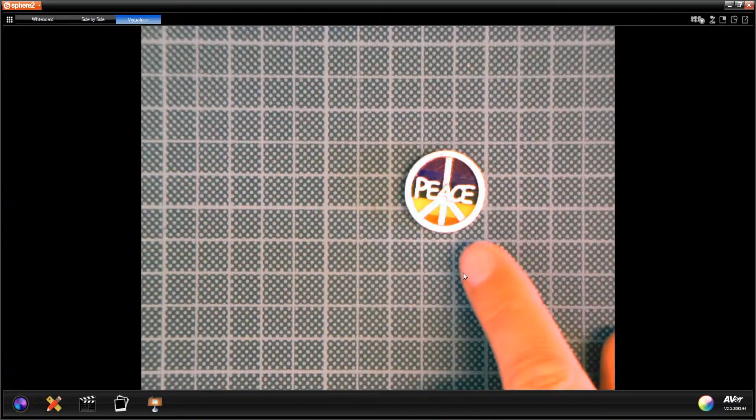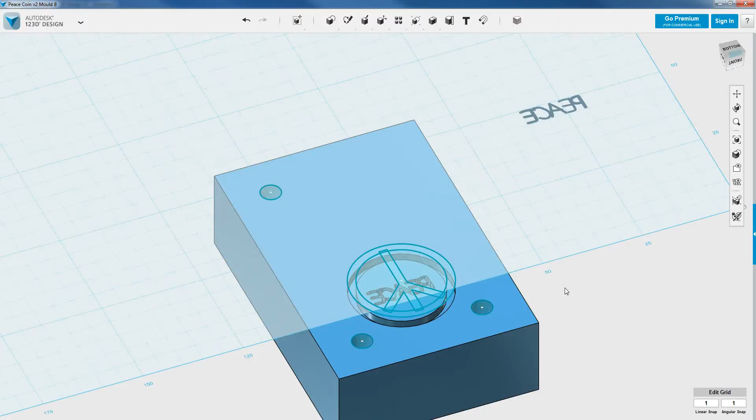This is Design Nations, and we're almost at a stage where we can go ahead and mill out the molds that are going to make this peace coin. This is the last thing I did, I made this other half of the mold, which is going to give me my peace symbol with these locator pins. What I want to look at now is how we can get this as STL files, standard tessellation language files, and place those into our post-processing software that lets us control the milling machine. If you don't get any of that, don't worry, we're now going to go through it blow by blow.

Let's export this as a 3D model, and I'm going to export it as an STL file. Fine quality, absolutely fine, same place as they were before. Let's just have a look at what I'm going to call that. I'm going to do something on my extended desktop here. I want to go to there. This was this file name here, so let's drop that in and save it as an STL file.

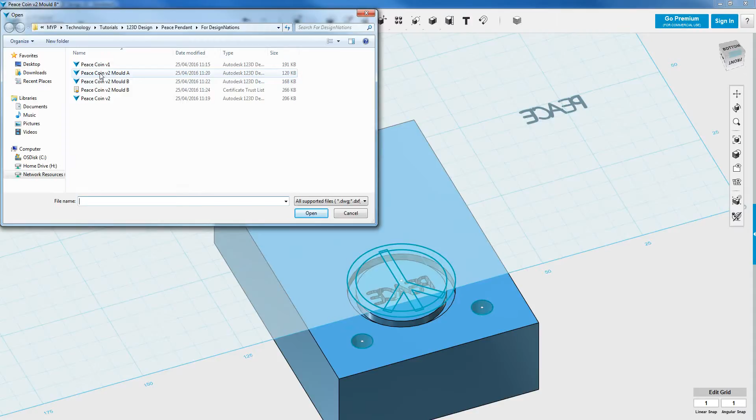Done. Now I'm going to open, I've already saved that so I'm fine. I'm going to browse, I want to open mold A, and I also want to export this as a 3D STL file. I'm going to call that mold A. Okay, absolutely awesome. Let's now have a look at a visual toolpath.

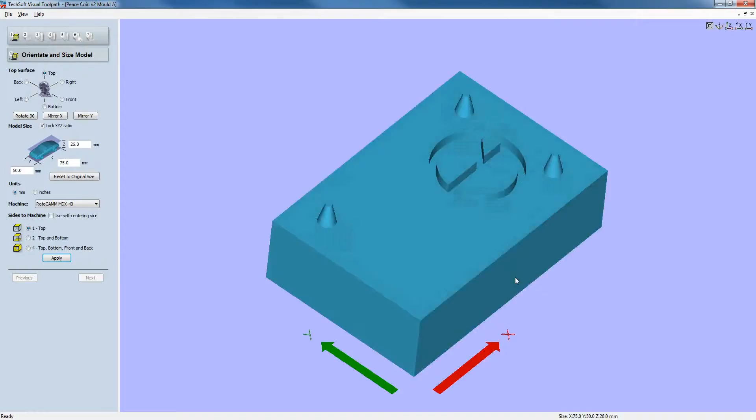What I'm going to do here is drag and drop these files in. So we have got an STL file for mold A, and there it is, this is what I made last time, okay. One or two things I need to do here. I'm going to rotate it so that X is the short edge because I'm going to mill it in this orientation, and I'm going to rotate it again. I like to have it the proper way around there. So that's the origin.

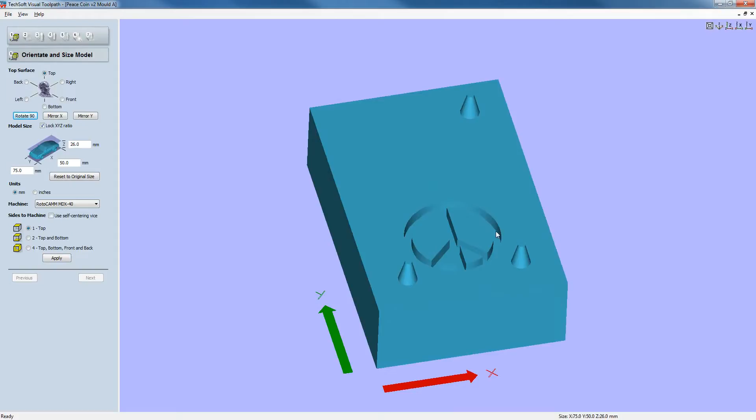Let's have a look here, yeah, that looks absolutely fine. I need to do a few configurations here for the milling machine we have in our workshop, so it's a Roland MDX40. I'm going to turn on the self-centering vice, I'm going to confirm that. Let's go next here, everything's good there, let's go next.

Do I want a roughing? I am going to have a roughing with this because I want to basically remove most of this waste material quickly. So let's go. Oh, I haven't got a roughing tool for this. Okay, well, you know what, let's make one right now.

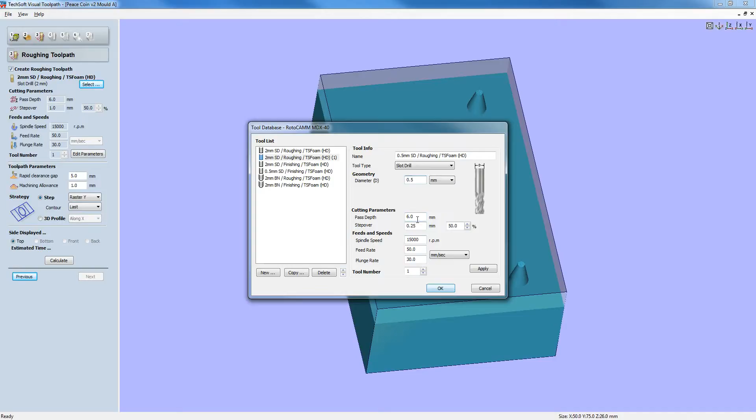Let's make a copy of that 2mm roughing. Let's specify this to be, I'll work with my 0.5mm slot drill. Diameter's 0.5, looking nice, I'm happy with that. Pass depth is going to be 4mm for the depth of the fluting. Apply, okay, and let's do a calculation. Machining allowance, okay, I'm not worried about that. And there we are, so it's going to do one pass, which is going to take off 4mm, and then leave the last millimeter left to work on.

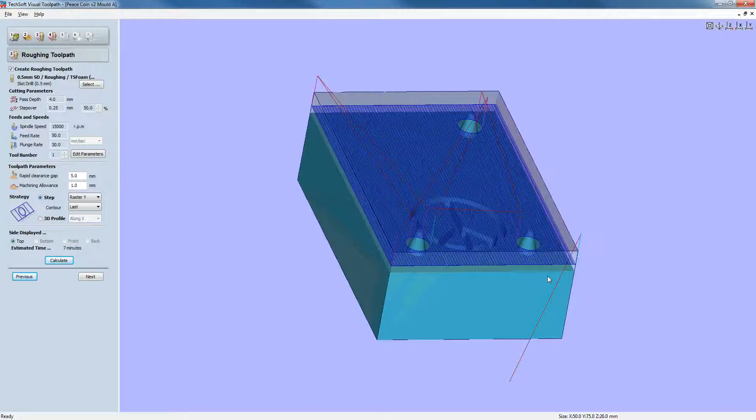So if I zoom out here, you can see this is the starting point of the tool. It comes in, drops down, and then goes backwards and forwards, over and over again, just making a few modifications as it doesn't want to cut out these pins.

Okay, let's come to the finishing toolpath. This is going to be with my 0.5mm finishing tool. I'm going to cut it along the Y because Y is the long length, it's going to be fractionally faster. Let that process.

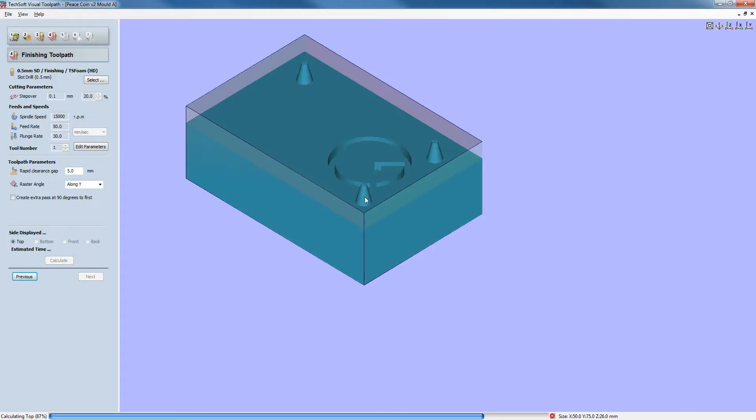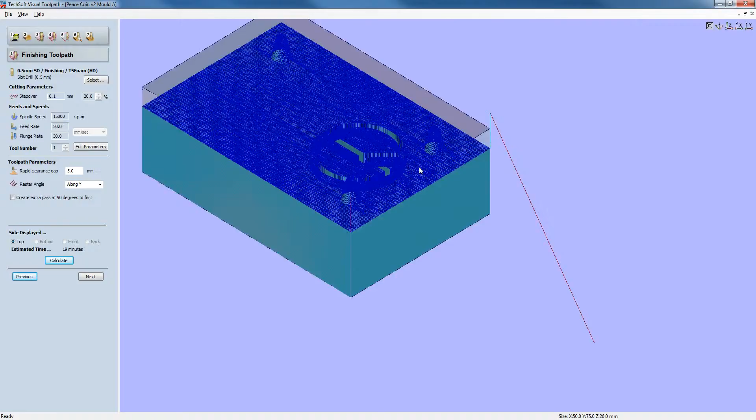And now what I can see, there we go. Again, it moves from the origin, comes in, and if I zoom in on this I can see, well let's just try and scale it a bit better. If I zoom in, each of these blue lines represents a pass of the tool, and it's going to be basically thousands of passes, in fact each pass is 0.1 of a millimeter, I believe. So as it moves into the actual cavity here, you see how the tool goes down and cuts out this peace symbol.

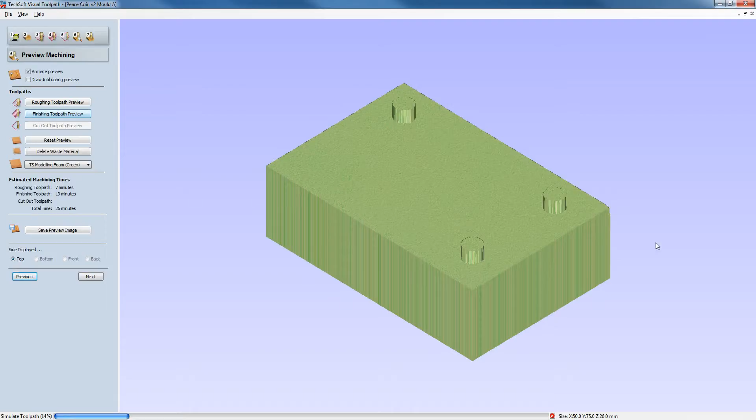So if I come to the actual previewing here, we're doing this onto the modeling foam, and what I'm going to get here is this. I have a roughing toolpath, which is going to cut out most of the material leaving space for the pins, and a finishing toolpath, which is then going to mill off that top face and leave me with the cavity here.

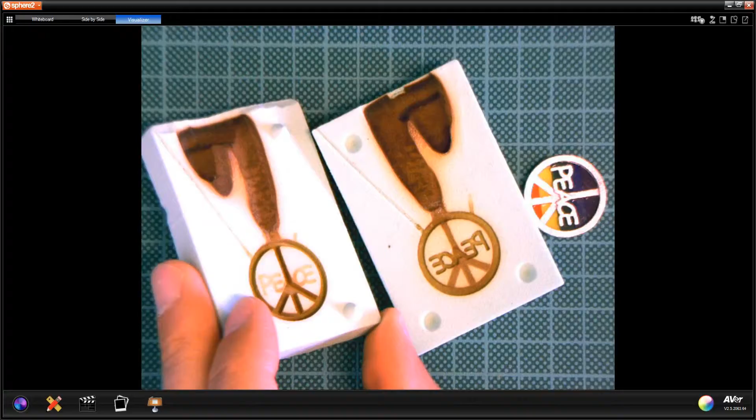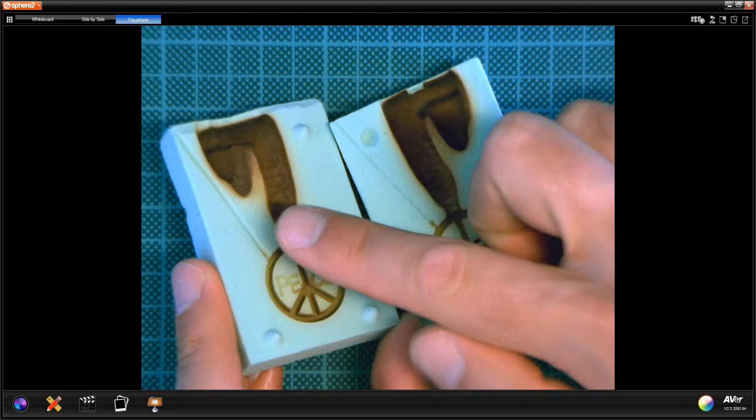And what I've just made in that video there, in that process, is this. I've got my locator pins, I've got the cavity. Notice the peace symbol is burnt in there when the pewter was poured in, and I've added in the well, the runner, and the risers here manually afterwards using a Dremel and a craft knife.

Okay, so that's one file ready to go. Let's just make sure that that is saved. And I'm just going to call it that, so that's fine. Okay, now let's start a new one. Can I just drag one in? Let's have a look here. Mould B, yep, here it is.

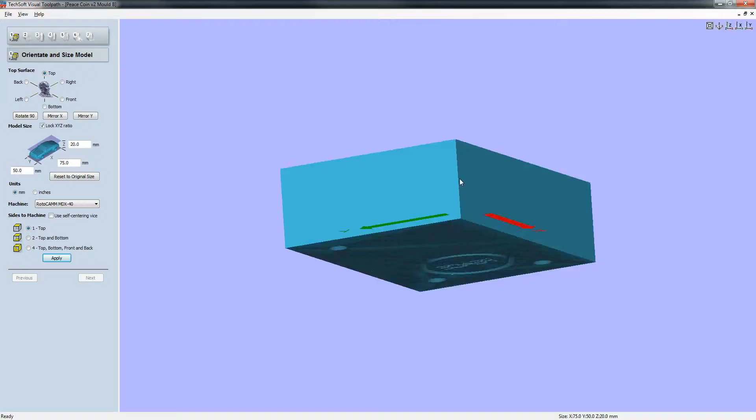Now notice that this one's upside down. Oops, okay, so I need to look at it from the bottom, and I want to rotate it. Again, I'm going to make it so that it's the right way around. So there we are, now the X is at the bottom here.

Now notice that the peace text here is inverse, and that's because, of course, when I actually bring the pewter model out, I'm going to be looking at it from this side. So let me just clarify what that means. This text here, which I'm going to make as a visual toolpath file, is the wrong way around. It's because then when I extrude the coin and turn it over, the text is the right way around. So that's where that comes from.

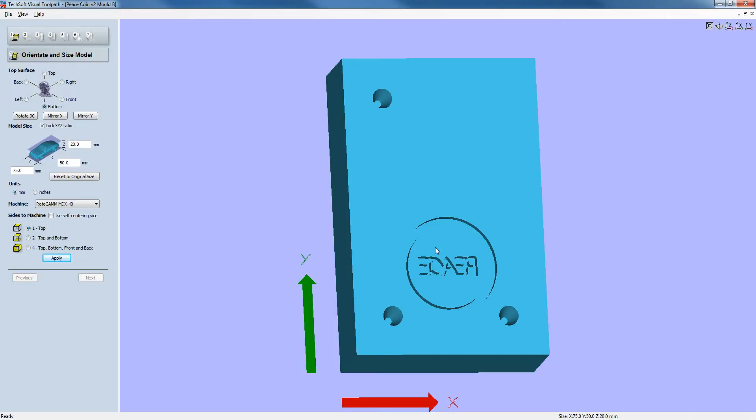Okay, it's going to be exactly the same process. Self-centering vice, everything's good there. Continue. This doesn't need a roughing cut because in this case I don't have to remove any waste material first. Remember the previous mold, I had these locator pins, which meant that I had to remove quite a lot of this material.

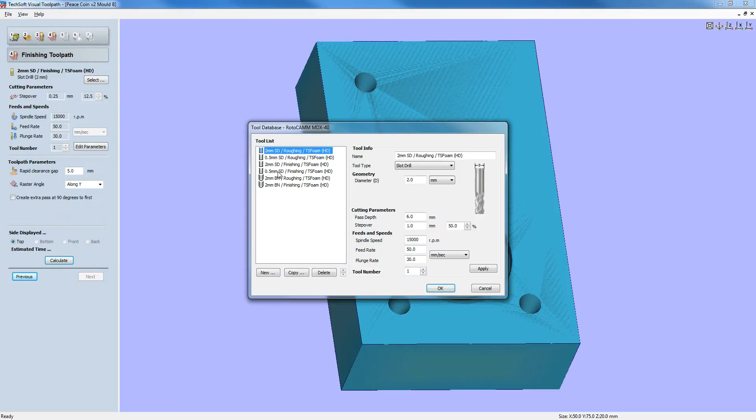So I'm going to deselect roughing toolpath. Finishing is going to be the half mil diameter finishing tool along the Y. Calculate.

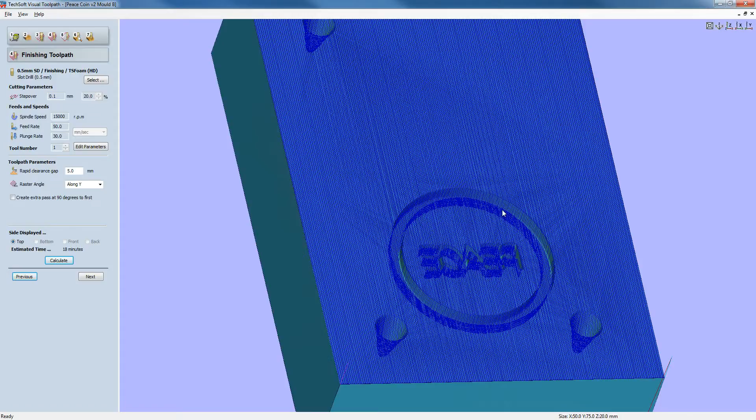Okay, fantastic. Again, here we can see the tool is going to come in from the origin, and then it's going to start to do thousands of vertical milling processes here, and it's going to cut down into the modeling foam to create the locator pins and to create the profile of the disk and the text. 18 minutes that's going to take.

Let's keep on going here, straight to the preview, and there's no roughing, so it's just going to do the finishing toolpath. That's what I end up with. So let's just put that into a view like so, and let's bring that across to here.

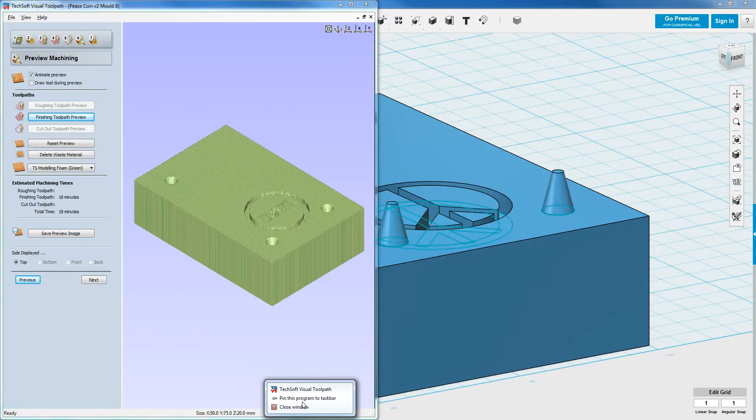Let me see, can I load up a visual toolpath as a new window? Can I drag in my other visual toolpath file? Yes, I can. Let's put this to the right. Let's see how that's going to look.

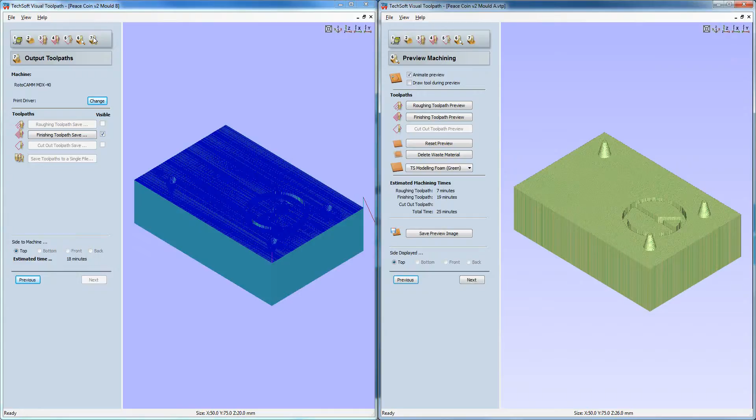Okay, and that basically shows my 2 molds ready to go. And finally, over here, that shows all the actual movements of the milling heads, and the same process there. And this is going to create, let's just put them in position on my camera, it's going to create those 2 molds right there.

Voila. So that's it. We are ready now to mill these out, and then I can go ahead, add in the wells and the runners and the risers, put the 2 molds together, and cast my little pewter badge.

I'm just going to show you one more thing before I sign off here, and that was the CAD file that I used to create the acrylic little colored flag there. And basically what I did, I think it's right here. Is it? It's over here.

What I did was I went back to my TechSoft 2D file that I made here, and I basically calculated how many stripes I wanted to have, and I made sure one of the things I had to do here is make sure that the acrylic stripes that come in here are both a decent size. They're not going to be so small that they basically disappear as tiny flecks of dust.

So I wanted to make sure that this line right here, for example, was not there, because I'd have had these tiny little specks of acrylic being cut out. So that's what I did there.

Then I got the contouring tool. I did some contours of these shapes. So I'll just do this very quickly.

So what that allows me to do, select click, shift click, shift click, shift click, and again and again, and I can now gridlock, pull this out. Okay, so that gives me this design here, and then I can start to separate these.

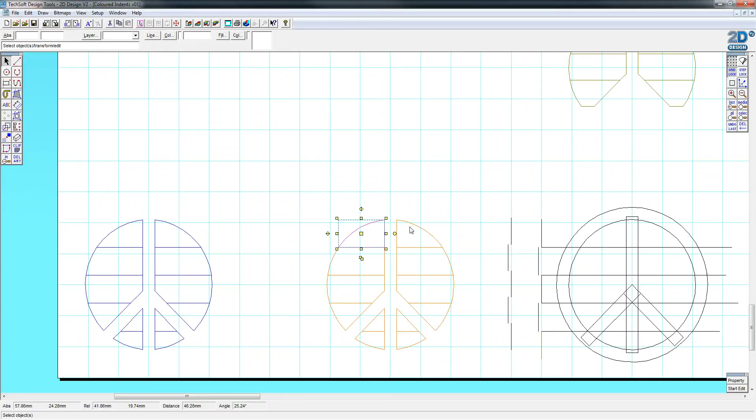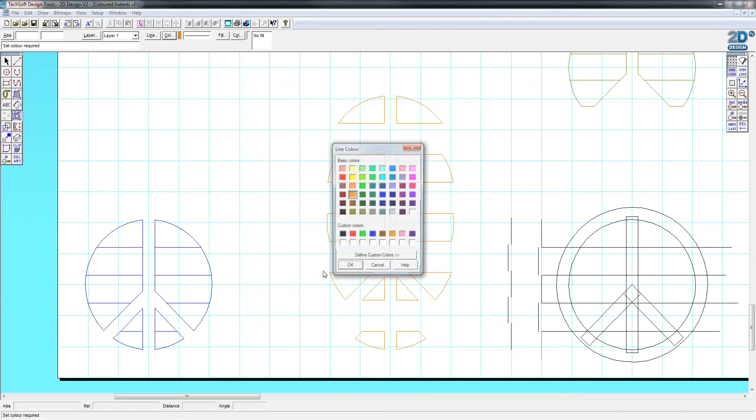And then I found that when I used the laser cutter, I had to give a 0.1 mil graphical contour, and that's because the beam on the laser cutter actually has a slight thickness. Let me just change the color here to blue, which is our color code for cutting.

So I did all this, boom, bada boom, bada boom, bada boom. So if I zoom in on this, you can see there's a very slight discrepancy between my original size and my actual cutting of the beam, and that means it takes into account the thickness of the actual laser beam cutting out.

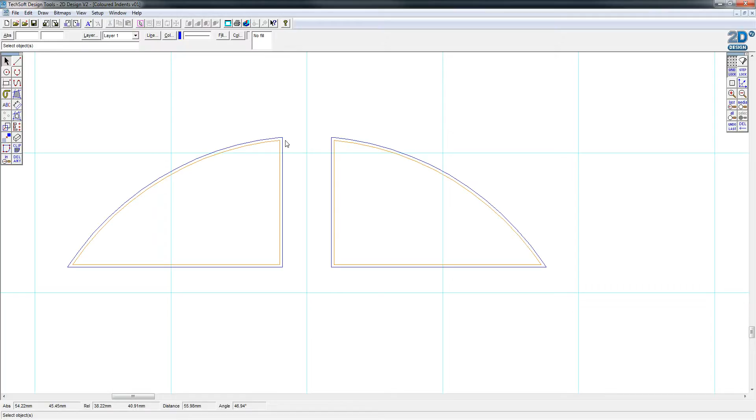And it also means as well that when I actually pushed all of these colored pieces of acrylic in, it was a tight fit. So the yellow and red little triangles down here, they were so tight there was no need for any glue whatsoever.

However, these up here, they were also a nice tight fit, but I wasn't very comfortable about them being a permanent fixture. So I did actually use some Tensol cement to glue it into place, which is a bit of a shame because if you look closely, there's a little bit of discoloration happening here.

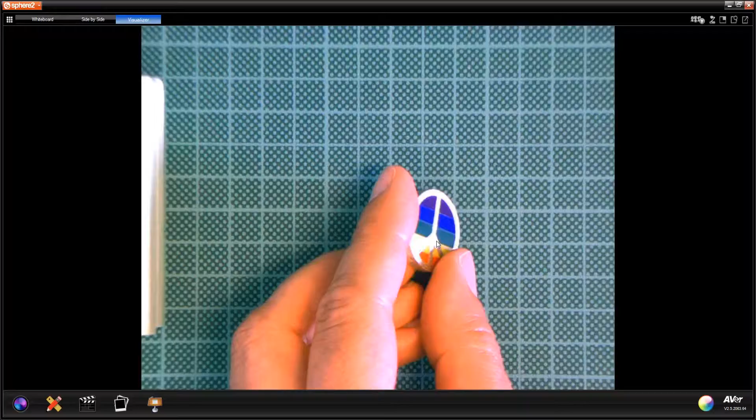I didn't want anything, I wanted this to be perfect. So when I put my glue on, I only glued on this face here. But nevertheless, it's just taken away the edge. But I think if you don't realize it's there, it's not a problem.

So there we are. That is my little peace coin finished. Pretty awesome, I think. Okay, so hope you found that good, and